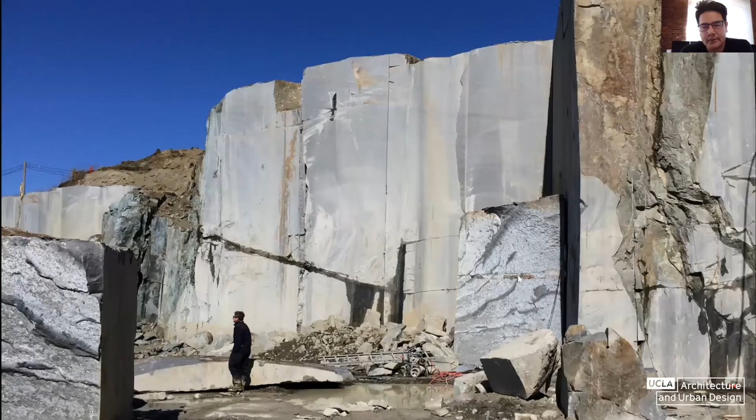12 years later, we think about media and we sort of wonder what about our lives isn't media, what isn't mediated, what isn't somehow already run through a kind of interface. So whether you're forming geometries on your computer or whether you're surveying a site for a project, whether you're cutting stone with a robot, all these things are mediated always already. And so we started thinking about what is material after media, not just media as a material.

And so we've been working on a book. This book is coming out in the fall. It's called Verify in Field, where we've shifted from media as material to sort of material after media. And this also corresponds to a shift in the kinds of projects we're doing, maybe less in the kind of electronic interactive realm, maybe more in the kind of material, hopefully still material innovation realm.

So when we ask what matters, the first thing that we think about is, well, matter matters, material matters, and what choices do we make as architects to sort of have a kind of greater impact? And so this first little project I want to share is sited in Spokane, Washington. It's about a kind of instrument for looking at the landscape. The site is quite dramatic. It's the sort of falls, you know, the Spokane River, and the kind of incredible topography of the falls.

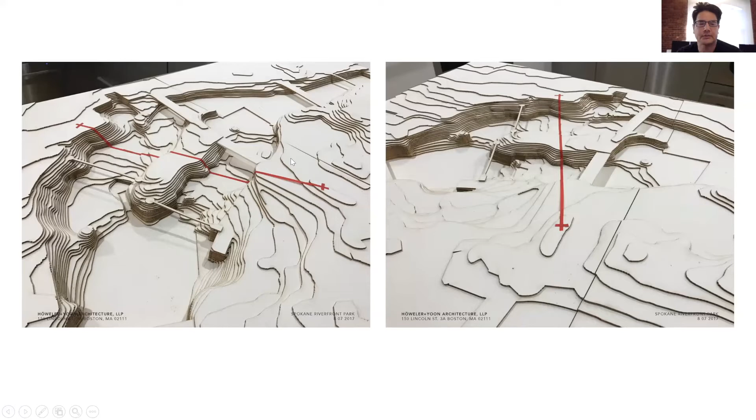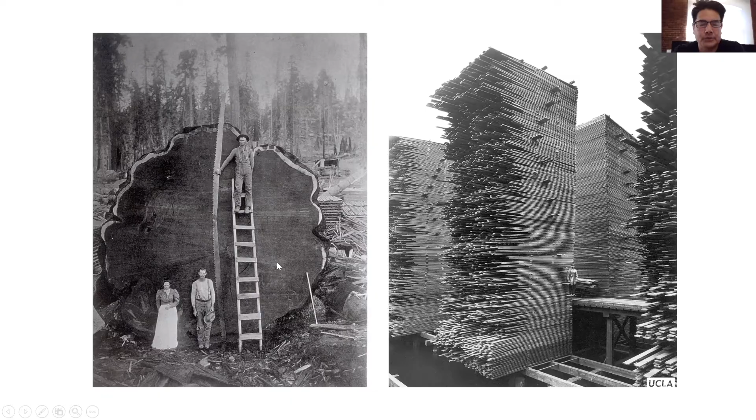Our initial concept was to situate two projects on opposite sides of the falls and have them sort of look at each other. And so a kind of place is in a way a kind of instrument. We also looked at the sort of history of the site and said maybe we can use material in an interesting way. So we proposed to use mass timber. It's something that we've been interested in learning about.

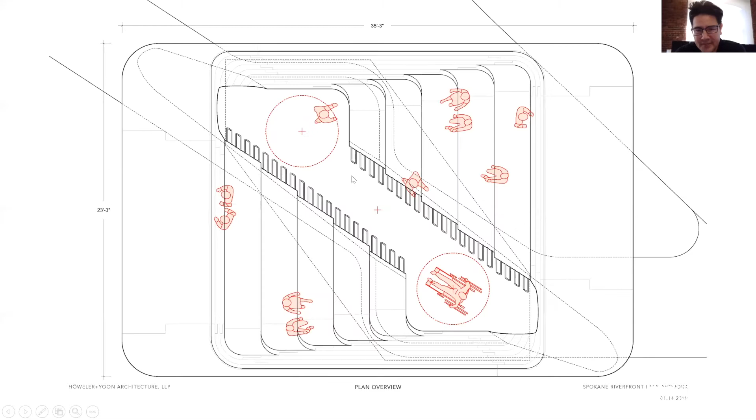So we were very interested in saying, could we do something with timber? How do we sort of think about mass timber? How do we use a project to sort of learn about mass timber? It's something that we are not experts on. So we proposed a small pavilion, a kind of two-part amphitheater that faces each other. This is the plan form: two little amphitheaters looking at each other.

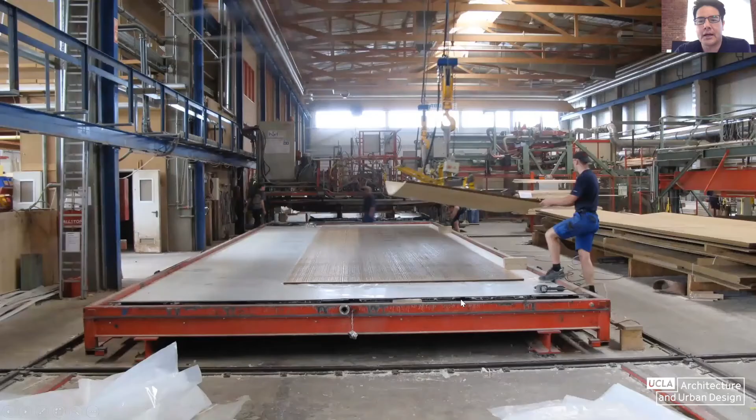And we noted that we used to think about wood in terms of the kind of craftsperson, the kind of shop. And now we think about the kind of industrial scale of wood, where wood is harvested, it's used very efficiently, it's composited and engineered. And then how do we use what we've learned from other materials about the kind of working envelope of some of these tools? And so we're looking at mass timber, not in the formats of beams and slabs, but in the formats of kind of sculptural form.

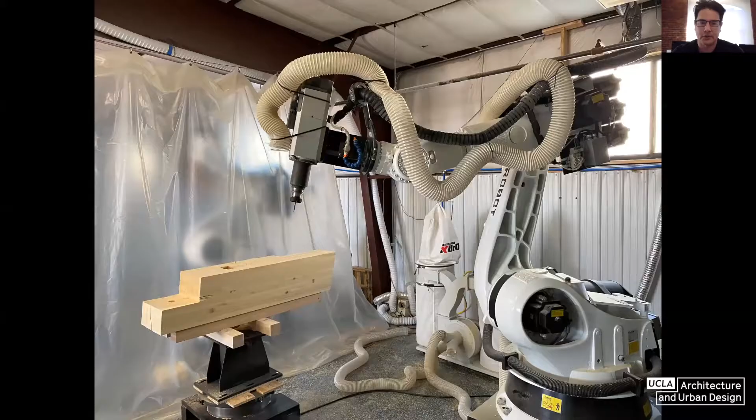And so this project, we call it the timber stepwell. It uses a kind of robotic work envelope to reconceptualize how we think about mass timber, not in terms of parallel planes, sheets, or columns, but rather as a kind of sculptural form where they're non-parallel planes, and we're really exercising the robot in terms of producing sculptural components.

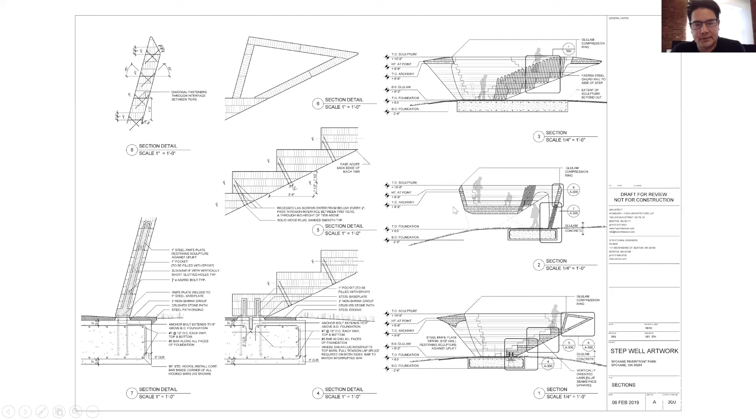So we're working with some collaborators we've worked with very often called Quarra Stone. They're based in Wisconsin. We purchased Alaskan yellow cedar. Quarra is laminating it into these massive blocks of timber, cutting it out, first with a chainsaw and eventually with the robot. So the rough cuts are done by hand. Eventually, the precise cuts are done with the robot, cataloging the parts and really thinking about mass timber in a different way.

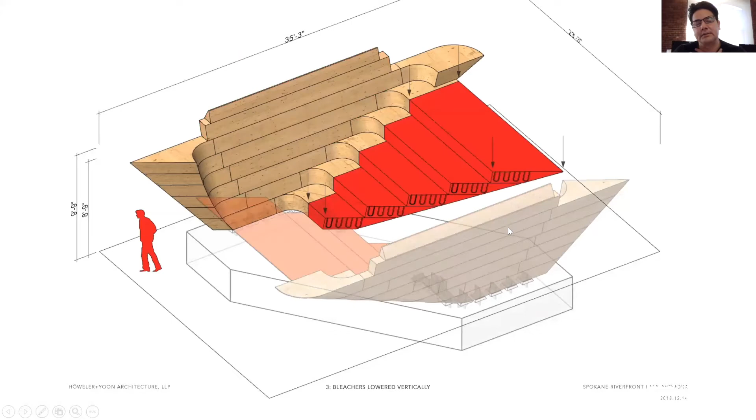Obviously, the benefits of this are arriving on site with very few components and being able to erect a structure quite rapidly. So repeating components and then infill pieces, and arriving at a complete structure very quickly. We think this is interesting to think about this material not as a replacement for steel or concrete, but actually as its own expressive capacities as a volumetric condition.

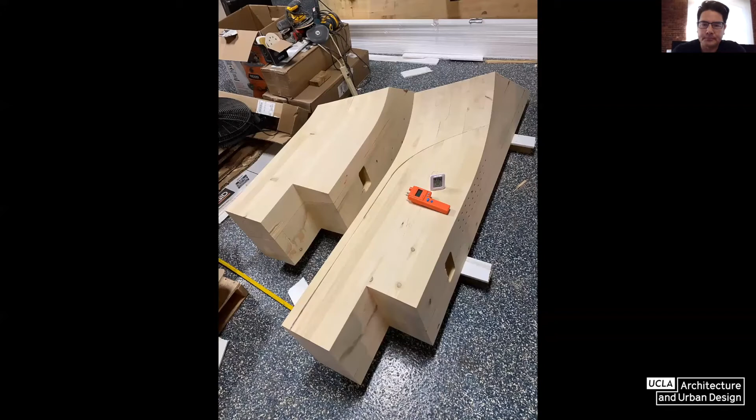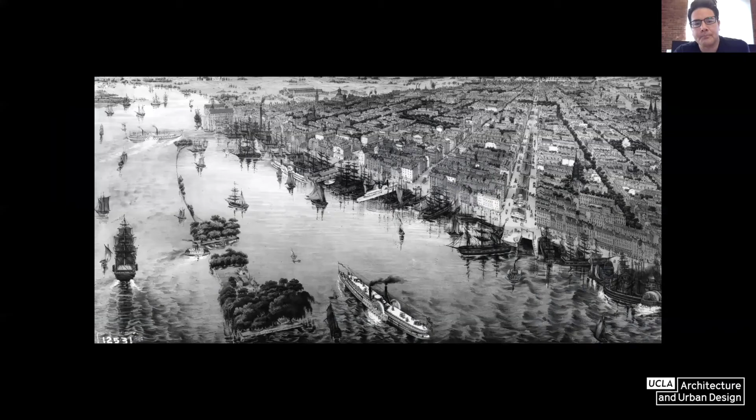The second thing that we want to think about is ecosystems. We know a lot about ecosystems. We don't quite understand how to embed ourselves in them. And so looking at a project in Philadelphia, we know historically Philadelphia is a city between two rivers that historically emerged as a kind of waterfront industry. Here between the Delaware and the Schuylkill is a proposal for the Schuylkill.

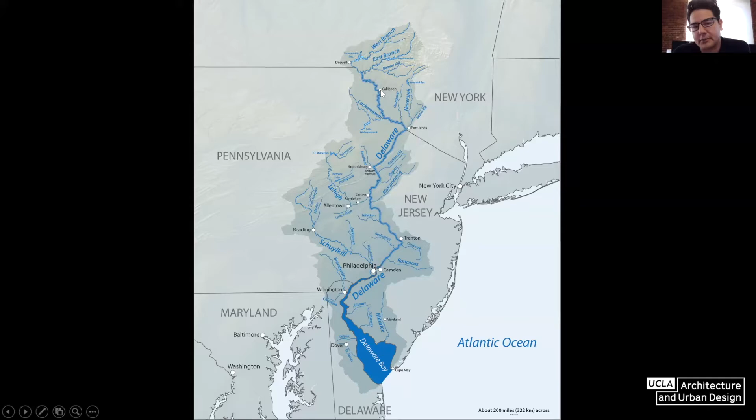And what we learn about these rivers is that their tributary area actually takes us all the way into coal country. And what I didn't know about Philadelphia is it's a kind of epicenter of coal, gas, and extraction. And so what we learned about the Schuylkill River is that it was highly, highly polluted. At some point, it actually caught on fire. And over time, it's been remediated. And that remediation has actually made the river accessible. Wildlife is returning, and we thought, how do we bring people back to the waterfront to experience that ecosystem in their backyard that they forgot about, that they turned their backs on?

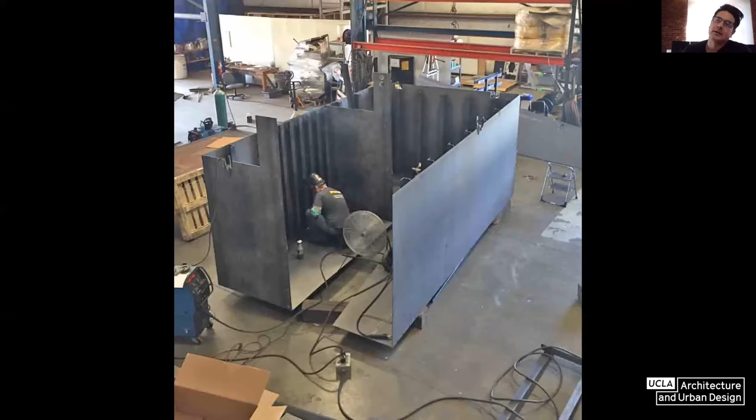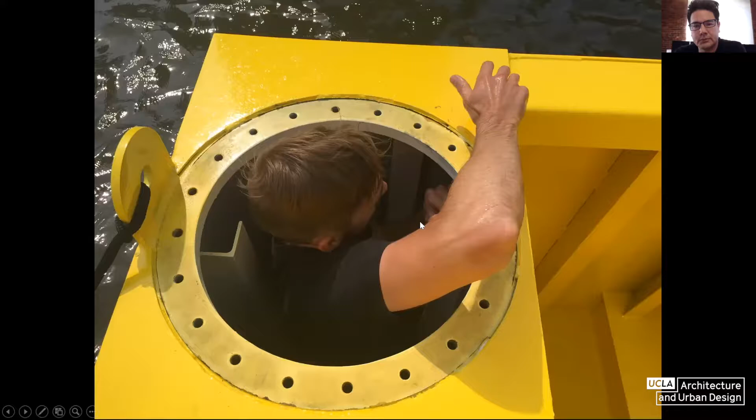We can sink this steel barge basically into the river and produce a new vantage to appreciate the river almost at eye level. And so this was the mock-up that we deployed in Philadelphia. And having done this, we were able to secure the money, the $2 million, to build the real project, which is this one.

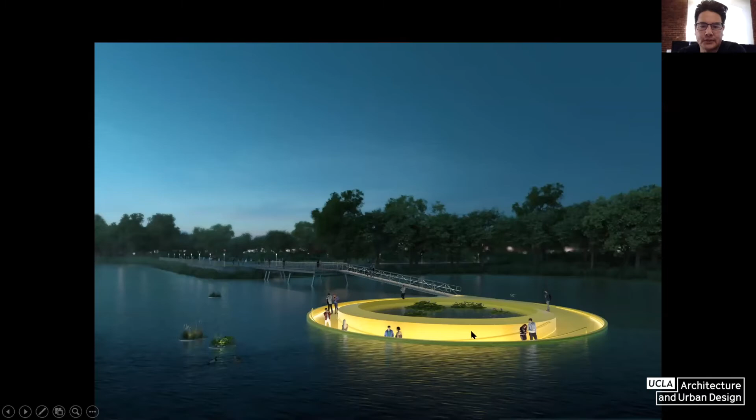And so this is a project we've been working on for about 4 years now to get the permissions and the permits. We have to go through the building department, but also Parks and Recreation, but also the Army Corps of Engineers, but also plenty of other authorities having jurisdiction. So this is a rendering of what we call Float Lab. It's intended to provide these interesting vantages, but it's also scaled to be able to host a number of outdoor workshops and classrooms.

This is connected to Bartram's Garden, which is a botanical garden. And the hope is to bring kids to this place, have them do some activities, have them check the water quality, have them peer through microscopes, have them look at the city from a new perspective, and understand in a way the history of this urban ecosystem vis-a-vis the skyline, but also the extraction industry that's in a way bracketing this urban waterway.

Another thing that is very much on our minds is this question of memory, and how do we think about the status of memory in the age of instant updates and notifications. As we're distracted by our phones and constant beeping and buzzing, are we still capable of remembering? How do we remember things that are important?

So this project was a memorial we did for Sean Collier, who's an MIT police officer who was killed a few years ago during the marathon bombings. And MIT asked Meejin to design a memorial, and they said, we'd love it if it could contain some patriotic symbols like flags and stars and stripes. It'd be nice if it had a boulder, because Sean loved nature. It'd be good if it had some trees, so a kind of list of requests.

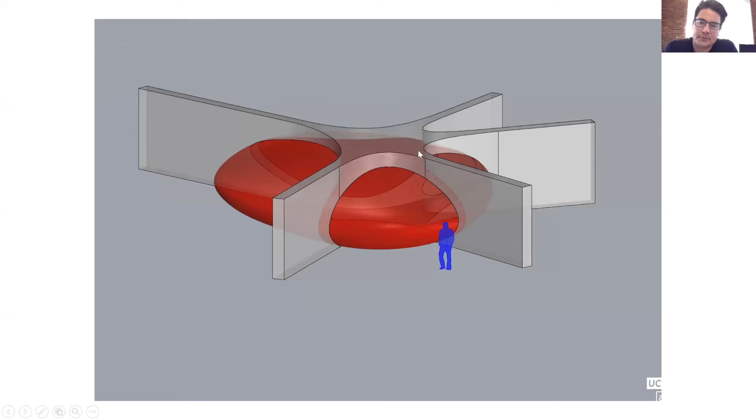This question of symbols and stars and stripes was hard to think about, but we thought maybe the hand was something more accessible, maybe an abstraction of a hand as it intersects with a figure, and the subtraction of that figure through a Boolean operation could produce a hollowing in the urban landscape of MIT's campus, such that you would feel like there was something missing here, a conspicuous absence.

So this is the site. It's right between Frank Gehry's Stata Center and the Brain and Cognitive Science Center. And this is the Koch Institute of Cancer Research. So this is where Sean was parked when he was killed. We proposed this figure to occupy the site. The idea is that it's a kind of gateway to the campus. When you walk through it, you might feel like there was something that was just here and now it's not, something conspicuously absent.

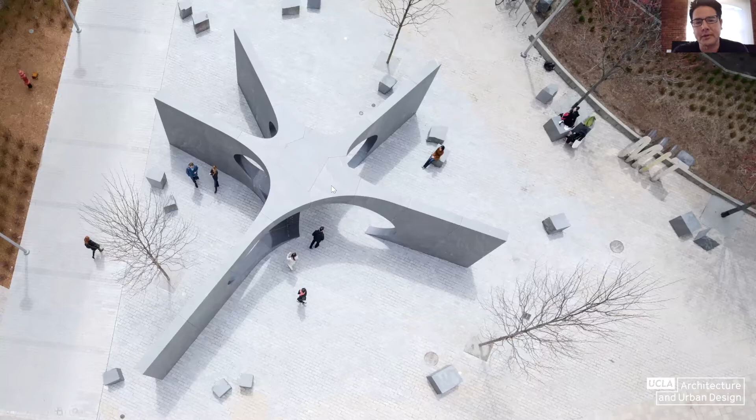And we thought maybe it could be made out of solid blocks of stone. We were admiring the fit of Inca masonry and said, maybe it could be solid. And so working with John Ochsendorf, a structural engineer at MIT, we said, could it be an arch? Could we achieve this voided figure as an arch, a five-way arch, an irregular, very shallow, very horizontal arch?

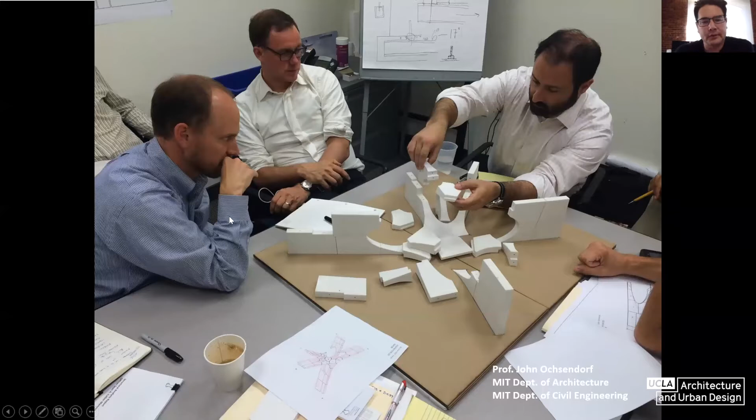So we proposed to MIT that we build this out of solid blocks. And with John's support as a structural engineer, he said it's perfectly achievable. In a way, it might be simpler to make them solid as opposed to trying to clad a steel or concrete structure. So we worked with John Ochsendorf here on the left, and then Hauke Jungjohann from Knippers Helbig in the middle, and this is Sam Morelli from Suffolk Construction. And here we're working with physical models to see how it would be done.

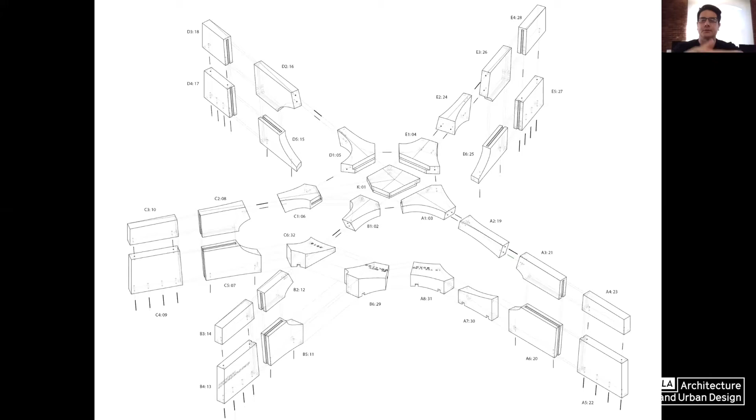We procured the stone in the quarries and found blocks large enough to meet our needs. And then working with the engineers, we understood that it's super deflection sensitive, and the transfer of forces really needed to be absolutely precise. We didn't want any misfitting stones, because misfitting stones could result in concentrated loads, and concentrated loads could result in spontaneous breakage.

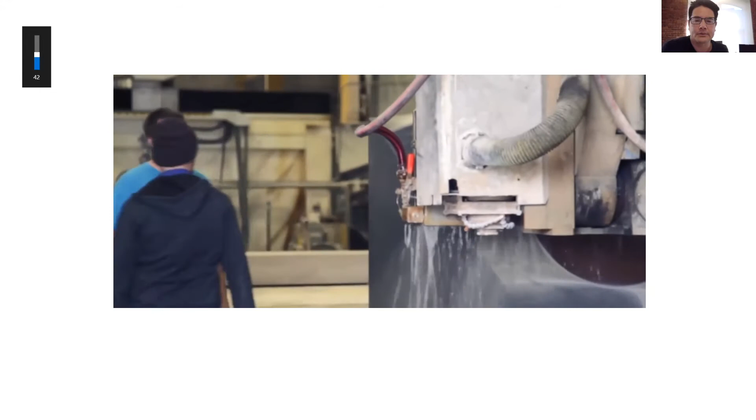So we really needed to ensure a kind of near zero tolerance fit. We did work with Quarra Stone again in Wisconsin to figure out a workflow that would take the stones from Virginia to Wisconsin to be carved quite precisely, and then trucked to MIT for installation. And this was our first encounter with digital fabrication at this scale. Quarra was fantastic in terms of asking the right questions, working back and forth across digital models.

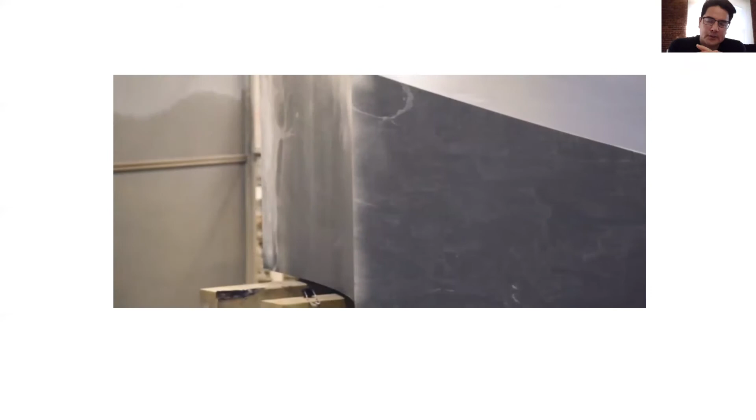And the part that I wanted to convey is, when you send a model and you think, well, surely they can just give me my model fabricated in stone, we neglect to talk about the kind of material resistance that the actual stone will provide. And when we think about precision of digital fabrication, we don't really think about how do we know that it's in fact, how do we verify?

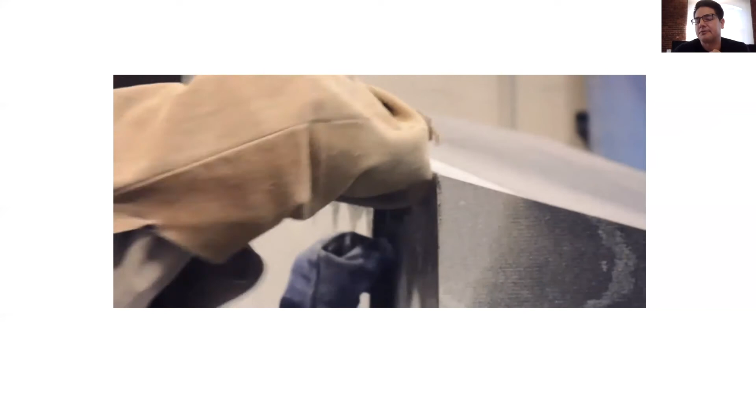So the question of verification that we're asking in the essay in the book is, should we think about techniques of verification at different scales? And so all the trust we have in digital fabrication leads us to believe that we can output a material artifact to the precision standards that we apply to digital processes.

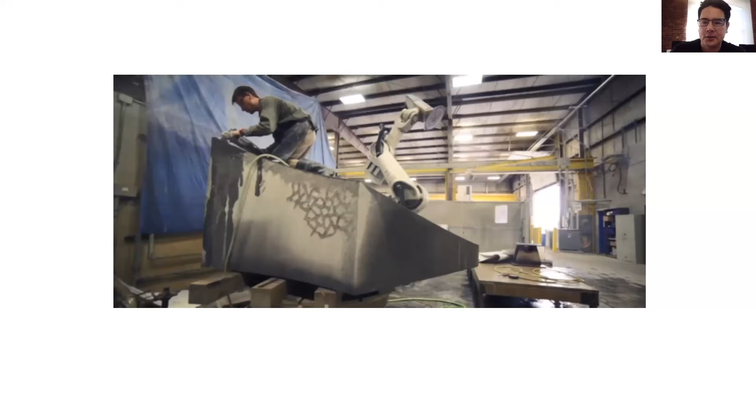When in fact, we were standing in the shop, and the owner of Quarra asked me, well, do you know where the interface between the tip of the saw and the stone is? And I said, well, sure we do. The saw is a certain diameter, and the stone has a digital model, so we should know where that interface is. And he said, well, the saw is cutting the stone, but the stone is also cutting the saw. So every time the saw passes, the diameter is diminished ever so slightly. And so how can we be sure?

How do we deliver the precision that you've asked for? It turns out that the saw needs to be calibrated after several passes, and adjustments made to the tool path to account for the diminishing of the saw blade. But in that moment, the idea that the saw is variable and the stone is variable, and that our digital tools actually have to take into account the material reality of the stone and the saw, was really eye-opening.

And so working with fabricators like Quarra that are thinking through these questions of precision and are kind of intolerant of tolerance, I think was highly eye-opening. We did develop a QA/QC process to verify with some point-to-point dimensions after the fact, so we could verify before they shipped. And once they arrived at site, they were then re-verified in terms of dimensions to make sure that they fit.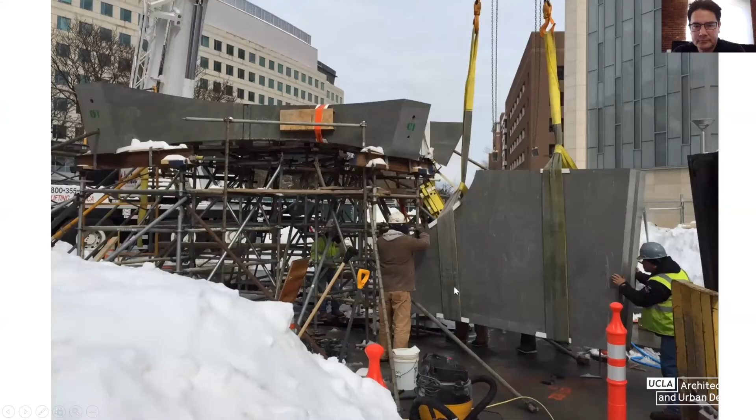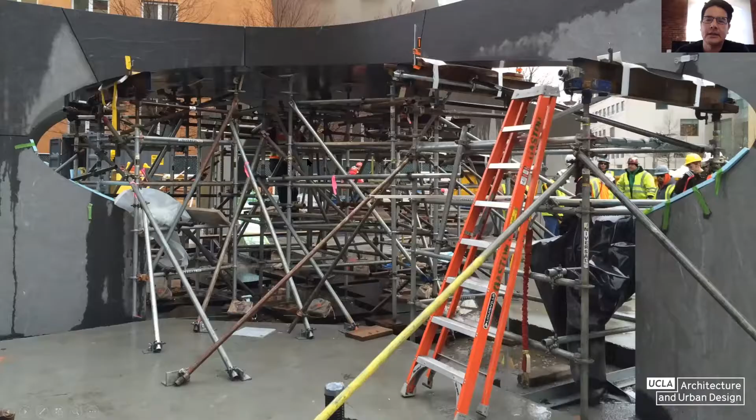Here's the first stone, the keystone, labeled K1. And this was constructed over winter to meet a very hard deadline of the anniversary of the killing of Officer Collier. It was built up on scaffolding, as you can see, and the buttresses were added to the vault, which is emerging. All this was built on industrial strength scales. So all the weight of the stone was measured as it was sitting on the scaffolds.

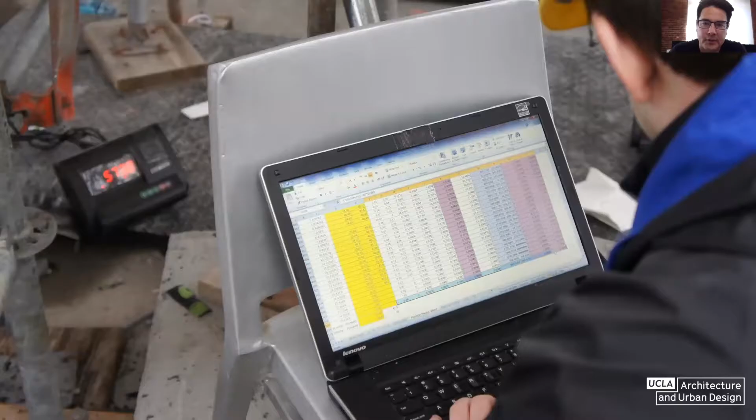Interestingly, you can't see force, but you can measure weight. And so we were measuring weight, and at the moment where the scaffold was lowered and the stone transferred from bearing on the scaffold to bearing on adjacent stones, we were able to watch the transfer process of the loading on the scales from the center to the periphery. So here's a real-time spreadsheet of the load that the scales are seeing. And we were able to verify that, in fact, as the scaffold came down, those forces were transferring to the adjacent stones and ultimately to the buttresses.

So after 8 hours removing the scaffolding, John Ochsendorf shouted out, we have arching action, which is super exciting after 9 months of watching these stone blocks suspended in midair, waiting for them to engage in arching action.

If you come to MIT, you'll see this memorial, and you'll feel the presence of this hollowing process. It's kind of remarkable. It has its own acoustic qualities in there. And the arch is so shallow that you've never seen anything like it. Yet it does seem somehow familiar, because this vocabulary of forms are forms that we've become familiar with in our digital spaces. We just haven't seen them materialized in this way in our cities and in our real life. So it has an uncanny presence on campus.

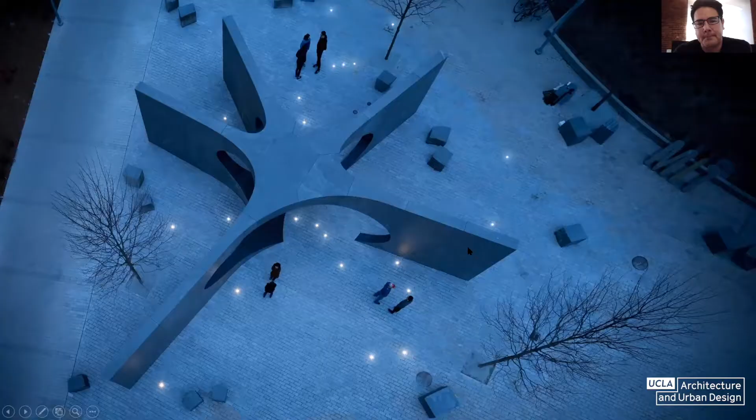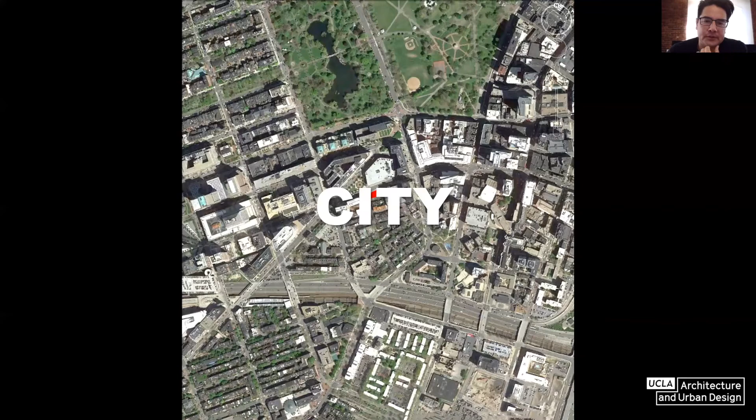Okay, another topic that we've been thinking about is the question of the city and how to build in the city. We've only just started building in the city of Boston, which is a kind of tough city to build in, partly because of so much historic fabric and the kind of processes in place for approvals that require a certain kind of acknowledgement of that historic fabric.

And so we're building a building in Bay Village, which is a landmark district in the city of Boston. So there's a very rigorous process for getting approved in this neighborhood. And we spent about 4 years on the approvals. So it's been quite a struggle. As the project went forward, we sort of sketched out some ideas of what we thought it might be.

It's a 20-story multifamily residential building in a neighborhood which is surrounded primarily by 2- and 3-story brick brownstone sort of buildings. But it's also along what Kevin Lynch would call the high spine. So there's a number of tall buildings that connect the Prudential to the downtown, and we are along that sort of corridor. So we're right between two neighborhoods, thinking maybe it could be tall, maybe it has to sort of defer somewhat to this historic neighborhood adjacent to it.

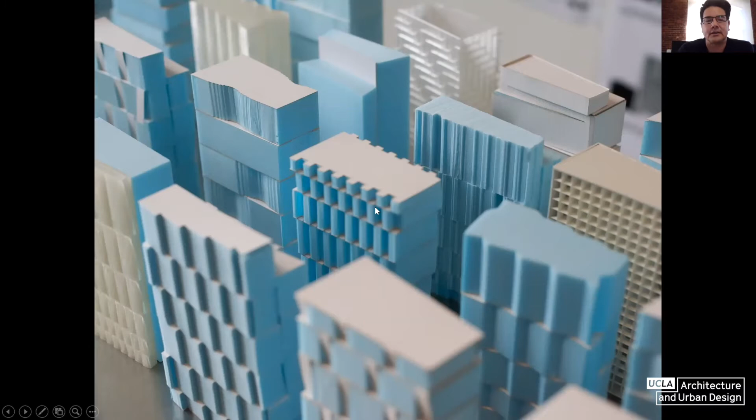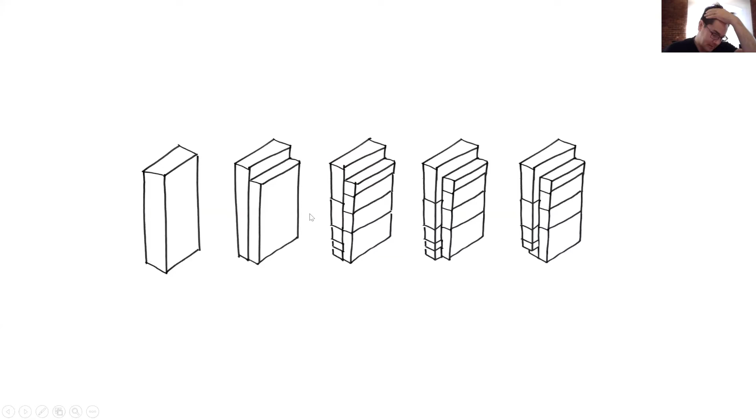So a lot of our studies had to do with scaling effects. How do we sort of break down the scale? How do we acknowledge the units? How do we provide outdoor spaces? And one of the things that we learned is that the perception of a building's scale is really a function of how we articulate its mass.

So we could articulate it as a kind of monolith, or what we've come to call a coursed block, almost like a series of masonry courses. So this was a proposal to course the floors into packages of 2, 3, 4, 5, and 6 that attenuates as it rises. In terms of the plan making, it's pretty much this whole site area. And so we've maxed out the site and strategically positioned the core and stairs to absorb the kind of depth that we don't need.

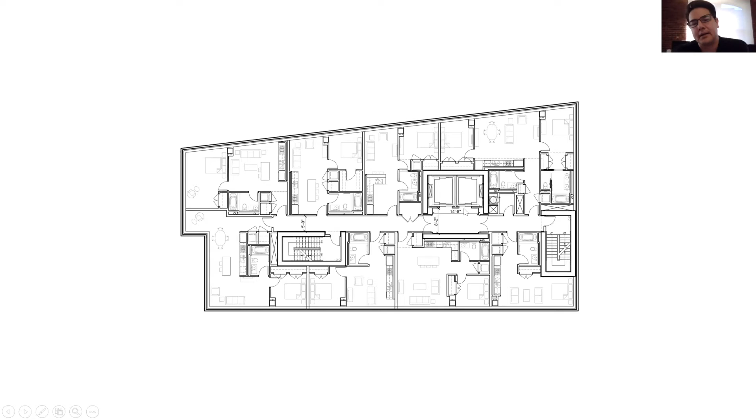And then the expression is really a question of how do we provide a kind of thick, sculptural skin that would be appropriate in this historic neighborhood. So we propose a series of concave piers that are made of repetitive molds, and then we tried to optimize for a lot of variation with as few molds as possible. We very quickly translated these into plaster and eventually stone to engage with the client and the community in terms of what would be appropriate in this neighborhood.

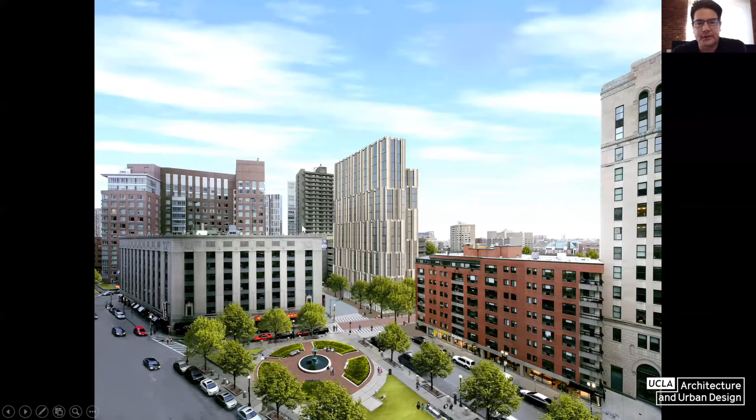And here's the proposal in its context. From the neighborhood, these 2- and 3-story brick buildings, this building will be a kind of bookend to the neighborhood. The fluting of the piers, I think, is a gesture to the textures of the historic context. And one of the arguments is that it's not stylistically related to anything in the neighborhood, but it does have a sense of quality.

And what everyone's afraid of is a building that is thin and unarticulated, that has no qualities. And so we've proposed a building that's thick and heavy, massive, as opposed to light. Another lesson we learned is that neighbors who are predisposed to object to new construction in their neighborhood respond better when you say, oh, you're not going to be looking at our loading dock, you're going to be looking at new neighbors in these townhomes.

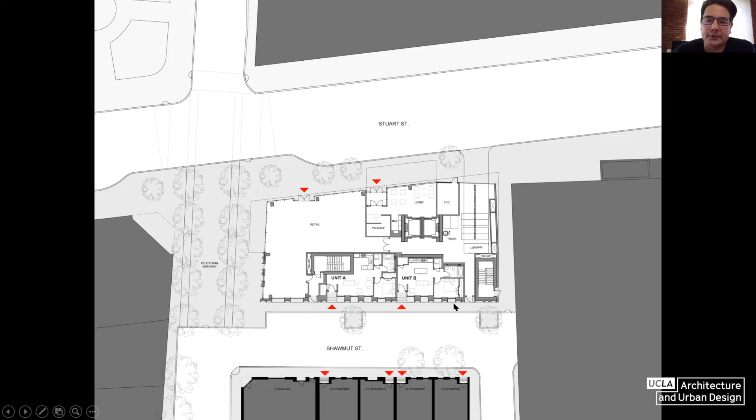So we have 2 townhomes facing across the street from these other townhomes. And so the loading docks on Stuart Street and Shawmut Street have more residential character. And so the detailing as this building meets the ground has a play on the decorative ironwork and the stoops and the planter boxes that the neighbors have. But it's how we manage to negotiate a tall building meeting the ground as it plugs into this residential neighborhood in Boston.

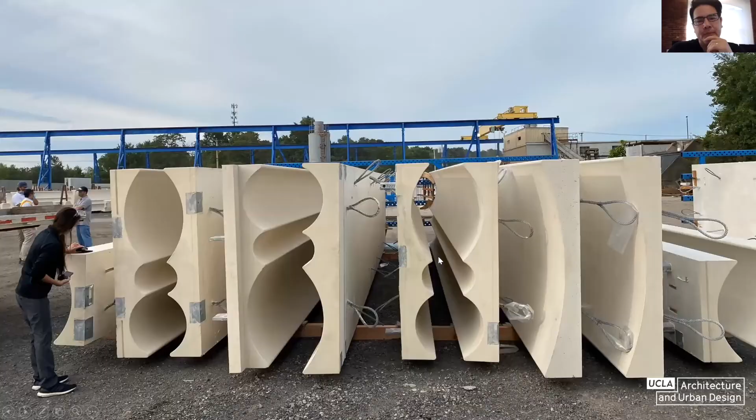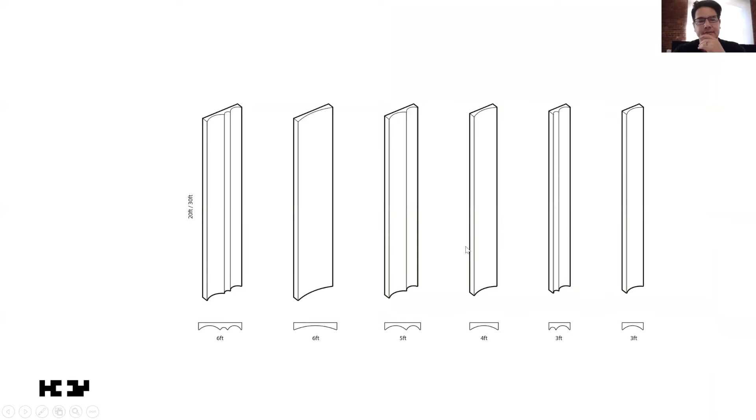And these are some of the mold pieces coming off the molds. We're admiring their geometries, and when they catch the light, they really come to life. We did a lot of studies of optimization for molds, and we learned that the best optimization is actually for picks, how many times the crane has to pick them. So we can buy more molds, but buying crane time is actually the thing to optimize for. So it's not material, it turns out it's labor.

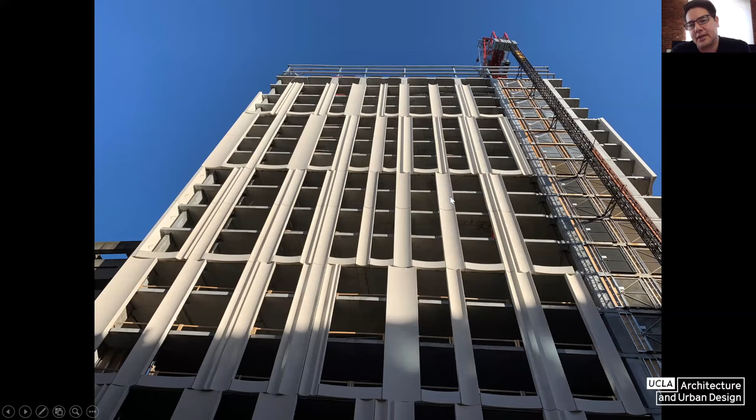And this one was from a few days ago, where they're placing this 3-story panel at the very top of the building. So I think we did develop a system which accelerated construction and minimized labor. It did introduce other problems like differential deflection and live loading on alternating floor slabs. But our hunch about saving time through labor was an interesting learning.

So at the same time, we've got globalization, we've got intense localization. And one of the things I say sometimes is that all construction, like politics, is local. You can't actually impose a universal construction in a place that you're not familiar with. The client for this project insisted that we build a traditional Chinese courtyard house. And because this was an opportunity for us, we said, of course, we can design a courtyard house in the Chinese tradition of Chinese courtyard houses.

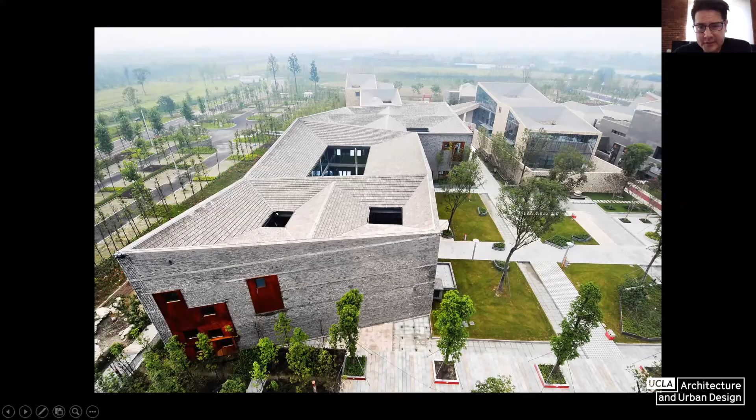So this is the project we built. This is now maybe almost 10 years old in Chengdu. It's supposed to fit into this odd-shaped puzzle piece master plan. We were asked to look at traditional Chinese architecture where the buildings form the frame and the figure. And so you have a building that is seen in the round, and you have buildings that are really part of a field condition. And then you have a wall that bounds the garden.

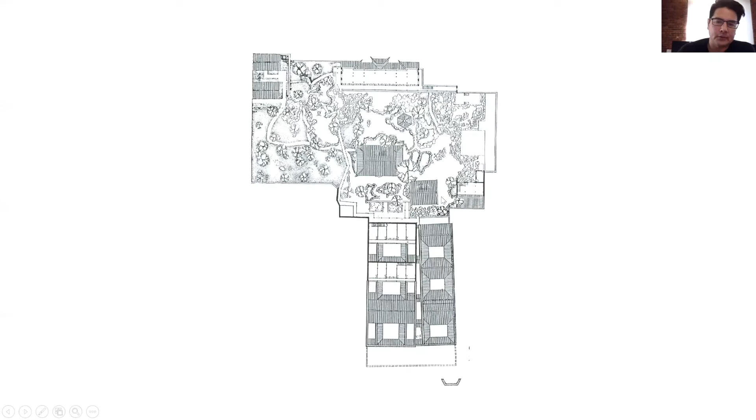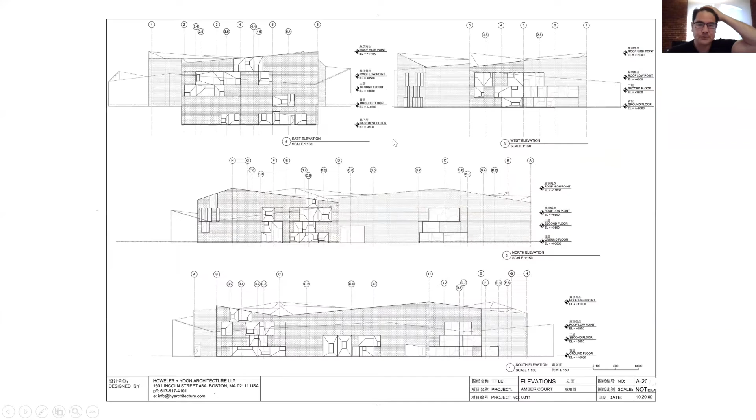The client sent us to look at these courtyards and gardens, and we tried to experience Chinese feeling in this moment here. My Chinese colleague said that foggy opaqueness, that's Chinese feeling. So we went back and revised our schemes. We came up with a set of drawings. We submitted the drawings, and then we didn't hear from them for 9 months. When we did hear from them, they said, your building's under construction, actually, and can you help us with the material choices?

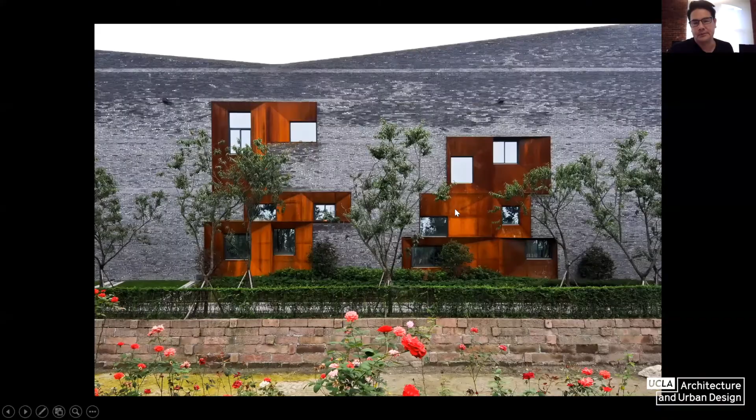And so we quickly developed a palette of these gray bricks and Corten steel window surrounds. The thing about this building is that it seems much taller than it is. It's a 2-story building, and the amount of opaque surfaces was quite significant. So amplifying the windows with these Corten surrounds, I think, helped give the fenestration a larger presence.

And the part that I think was really successful was where we looked at the most pervasive material available in the region, which was this gray brick. And we said, well, maybe if each brick had a kind of internal compass to it, maybe each brick oriented itself on the cardinal directions, maybe that would give this building some rigor. And so we did 2 sheets of drawings where all the east-west bricks are aligned, and as they start to transition to these oblique surfaces, they start to stagger.

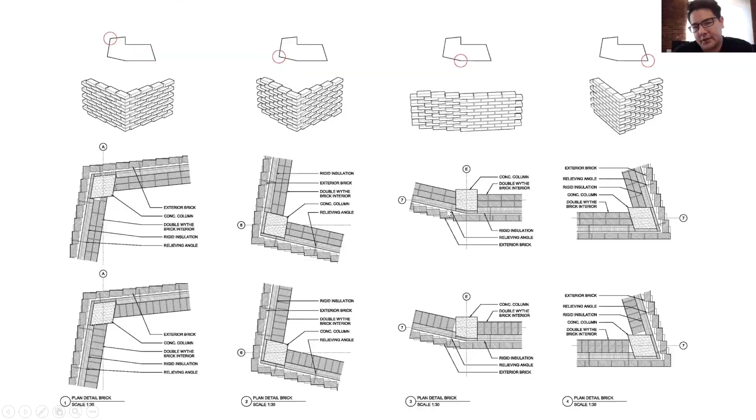And so at every corner, whether it's cardinal or oblique, the brick would signal a kind of true north. And so when you walk around the building, you see transitions from true east-west to oblique surfaces. An east-west wall meets a diagonal wall, and 2 oblique walls coming together.

And this very simple idea of giving each brick a kind of rule was something that translated very easily, not just to the client, but also to the stonemasons. And they were able to execute this without elaborate drawings, without a lot of templates and unique conditions.

This very basic logic actually gives the building a kind of signature texture. I think it embeds, or it encodes, the construction logic and the labor into it. And the client said, oh, this also gives me a kind of Chinese feeling. So we were able to succeed in making a connection, aesthetically, culturally, but also tectonically, to a client who was really insisting on something having a strong connection to place.

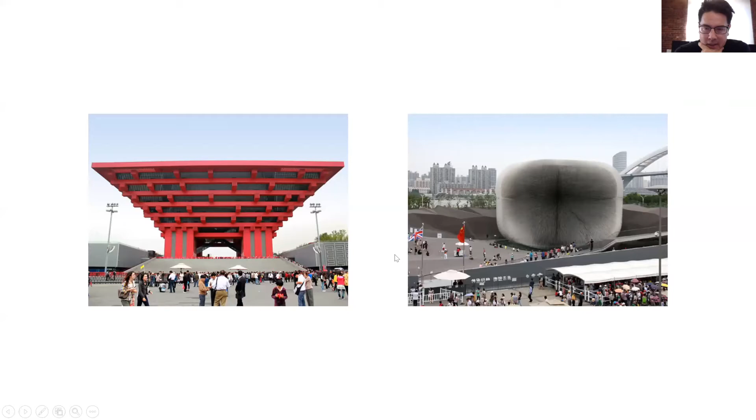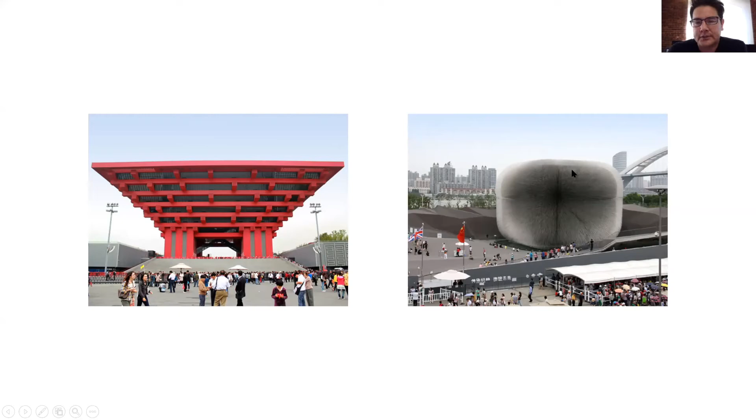We're currently still working in China. We're doing a lot of projects in China. One of them is in Shanghai, on the site of the 2010 Expo. This is Heatherwick's hedgehog pavilion. This was, I think, one of the Chinese pavilions. So the same year, 2010, when Heatherwick was building a building that had no easily understood edge, looking into the future, the Chinese pavilion was still recalling a traditional dougong, stacked lumber kind of form.

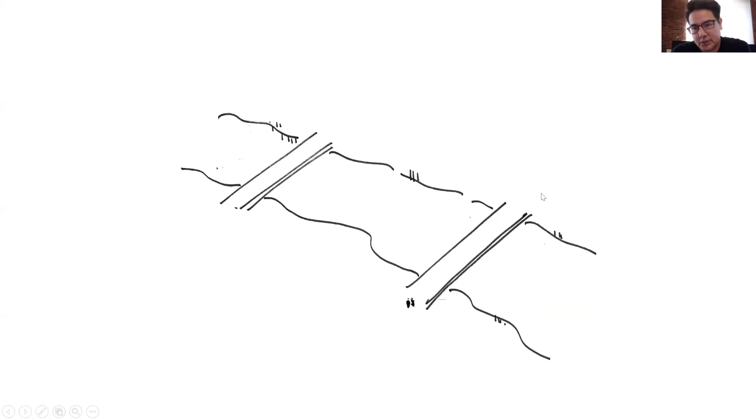So our proposal, this is the Expo site, is for 2 bridges on this artificial lake. We had spent enough time in China to understand that the Chinese landscape is not about a series of objects standing in the landscape. It's really a set of relationships between these objects. And so when we presented, we said, we're not building 2 bridges, we're actually building 1 bridge that frames the water.

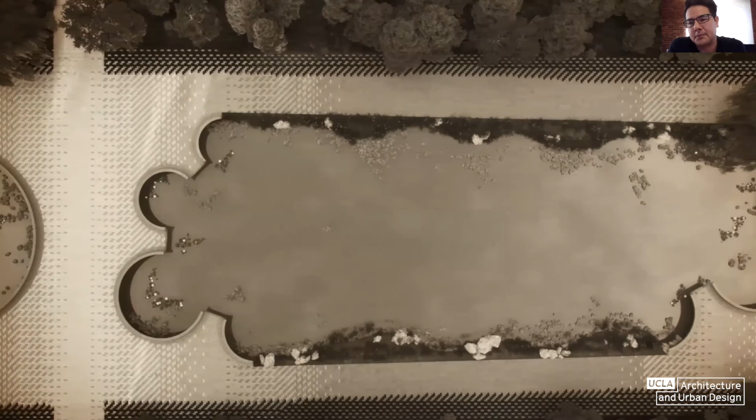And so this concept of a way to bracket the water and create a set of apertures that were about framing the water and framing the sky was what we presented. The idea that the bridge is not so much a way to get from A to B, but actually a place to be on itself, that there are destinations on the bridge, and that there are moments on this bridge that look across at other moments on the bridge.

And so being able to articulate how this might tie into a larger tradition of Chinese garden structures was, I think, one of the reasons why we were successful in this competition. So we call it the Moon Gate Bridge. The Moon Gate is one of the most iconic of Chinese architectural devices. But rather than framing views or portals, we're actually framing the reflections in the water and in the sky. So that was one of the slides we showed.

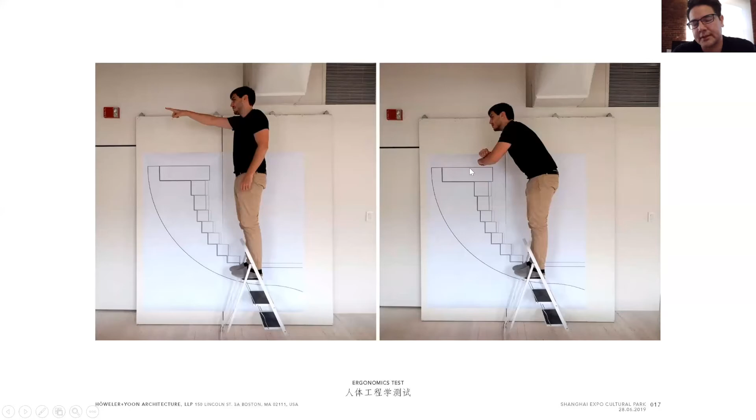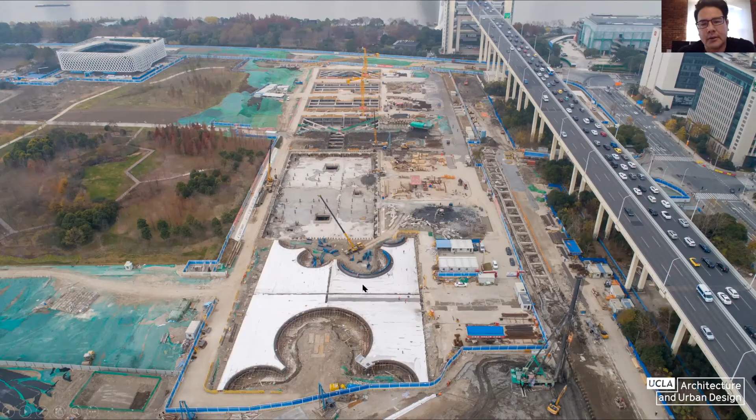But also getting construction photos is always kind of exciting to see that they are in fact moving forward with this construction. So this has been under construction almost entirely during the last year during COVID. So no one's been able to travel there, but we do have lots of communications with the client and the LDI, the local design institute, on everything from formwork to concrete mix to stone selection and everything.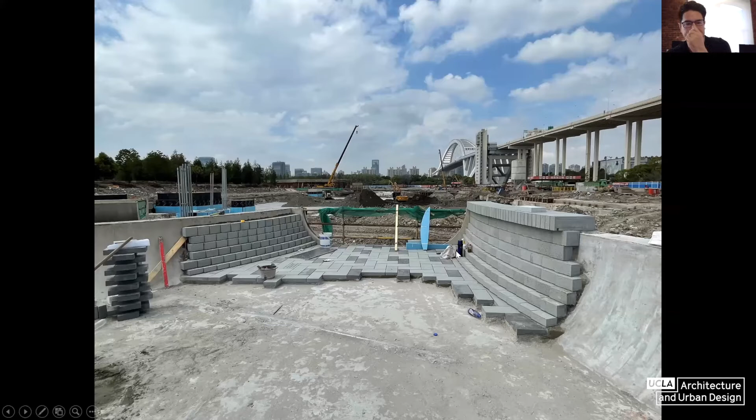So this formwork is quite impressive. It's a compound curvature that forms that concrete liner, which is then faced with the granite blocks on the inside. So this is exciting to see this coming together.

The last project I want to show, and then I'd love to open it up for some questions, is the question of institutions. I think as architects, we're subject to all kinds of external forces. We're not sure where we have agency. And institutions seem to be one of the sites of power or opportunity, capacity.

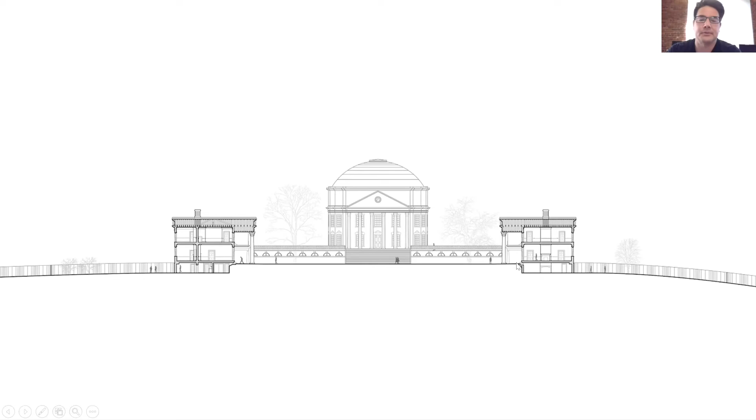And so these gardens surrounded by the serpentine walls that we know from architectural history are not so much about pleasure gardens and any tradition of garden making, but they're actually concealing the day-to-day life of forced labor. And so when you think about that, and you think about Jefferson as an architect, it completely changes the way we think about the ideals upon which the campus was constructed.

And so I believe it was 2008, the leadership of the University of Virginia laid this stone at the bottom of the rotunda to honor the several hundred women and men, both free and enslaved, whose labor between 1817 and 1826 helped to realize Thomas Jefferson's design for the University of Virginia. So this stone plaque was incorrect. It was too small. It was poorly sited.

The insufficiency of this plaque, I think, is what catalyzed a group of students to form what they called the MEL, the Memorial to Enslaved Laborers group. And they created pressure and visibility to this cause to force the university to acknowledge its history in a significant way. And so from pressure from the student group, the university took a number of actions, including forming the President's Commission on Slavery and the University.

They did scholarship, they looked through documents, they assembled names, and the last thing they did is they hired an architectural team to develop a concept for the memorial. And so this process was ongoing for, I believe it was 6 years, before they brought a team in to start to work on this.

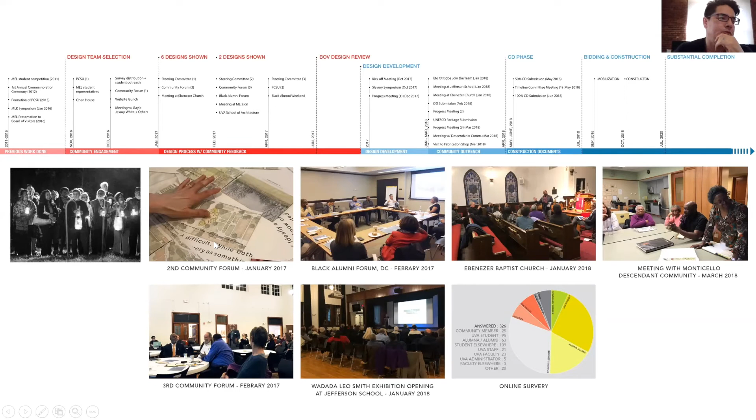We put together a team, Megan and myself, with Frank Dukes, who's a UVA professor, a kind of community engagement specialist, Mabel Wilson, who's a historian and an architect. She teaches at Columbia. Gregg Bleam is a landscape architect, local to Charlottesville, and Eto Otitigbe is a Brooklyn-based artist. So we put together this team, and before we started designing anything, we sort of designed a process.

And so we met with communities, met with faculty and students, met with people in the neighborhoods, people that were descendants of the enslaved, and we listened and we heard. And for 6 months, we tried to figure out what it was that they were interested in, what a memorial could be. There was no site, there was no budget, there was no program. And here's Mabel and Frank in one of our charrettes.

We did a lot of meetings with students, a lot of meetings with neighbors, with people in the community, understanding the history of enslavement at UVA and building on the fantastic work that the President's Commission on Slavery and the University had done. There's a lot of outreach, and at the end of the day, we made a few proposals for where it could be. We were struck by this term, "Let Freedom Ring,"

and what we learned about this African dance called the ring shout, and we thought maybe it could be as simple as a ring, just a kind of empty hollow, a kind of clearing where people could define a kind of void, so similar to the MIT memorial, where the main effect is a kind of emptiness. Here it's much larger. It's a kind of 80-foot diameter patch of grass that's encircled by what we call a kind of rising ridge or horizon line.

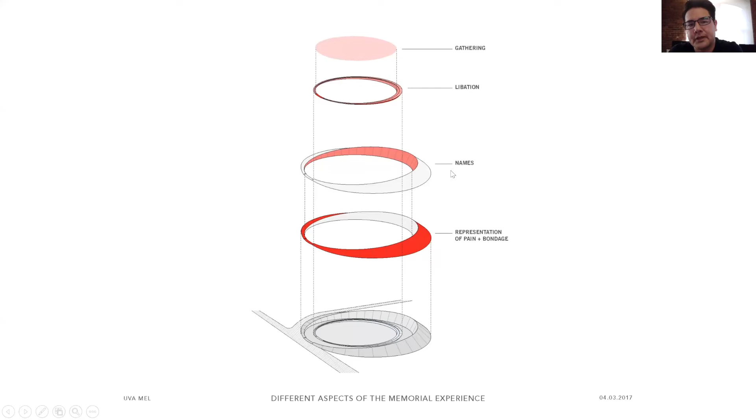So this represents two cones intersecting, one with a rotated axis, but it produces a kind of interior surface and exterior surface. And it masks, in a way, the context. So this was one of the representations where we can create a kind of clearing for people to gather, a place to gather for them to recognize themselves as a community, but also to reflect on what the history of this place has been.

It turns out it's almost exactly the same diameter as Jefferson's Rotunda, which was actually a surprise to me. It's about 80 foot, kind of half a sphere, kind of dome, and a kind of bowl-like shape. So they seem to be in dialogue. Some of the geometry, some of the construction documents, and then mocking things up. We set the angle of this cone by the tip of your toe to your outstretched arm, and then how does that rise over your head so that you're not looking out, but you're looking in.

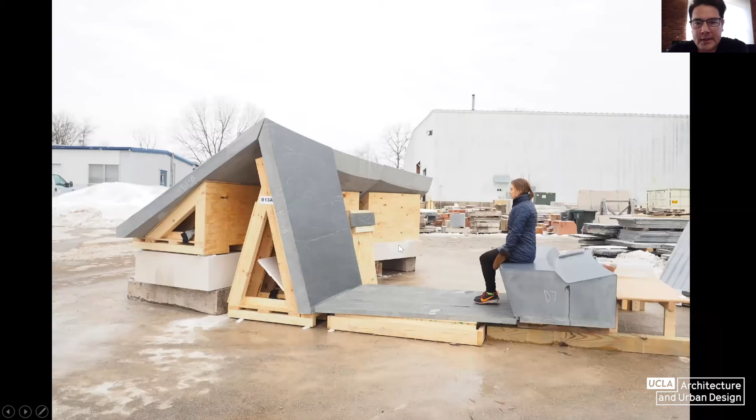And then from the outside, how do we create a surface that creates an explicit sense of enclosure, and invite you to come around and enter it. So again, we worked with Quarra Stone in Wisconsin to carve and mill these components to form this cross section. Working with Eto, he was inspired by the crude stonework in some of the gravestones from that period.

She had actually been taught to read and write. And after the Civil War, she stayed in Charlottesville and taught at the Jefferson School, and wrote about her experiences. And so she's one of the few of the enslaved for whom we have a photographic record and for whom we actually have writings describing her experience.

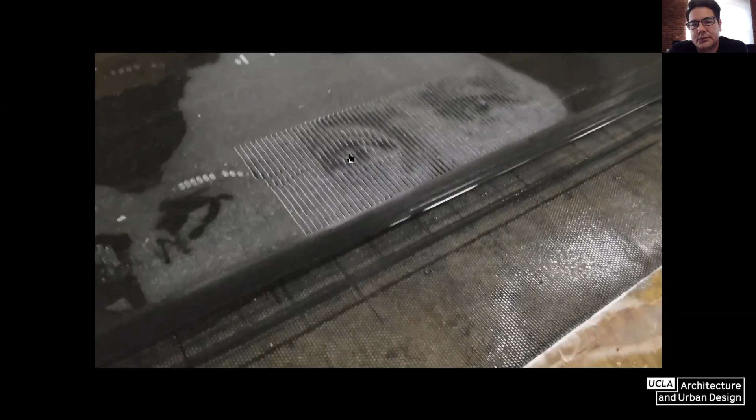Eto's previous work had looked at self-portraits and translating images from raster to vector files. He had carved his own portraits using basically scripting CNC tools to alter the depth of a groove. He took Isabella's portrait and her eyes and etched it into the stone to create a series of grooves that would contain in their variable depths a kind of abstraction of an image.

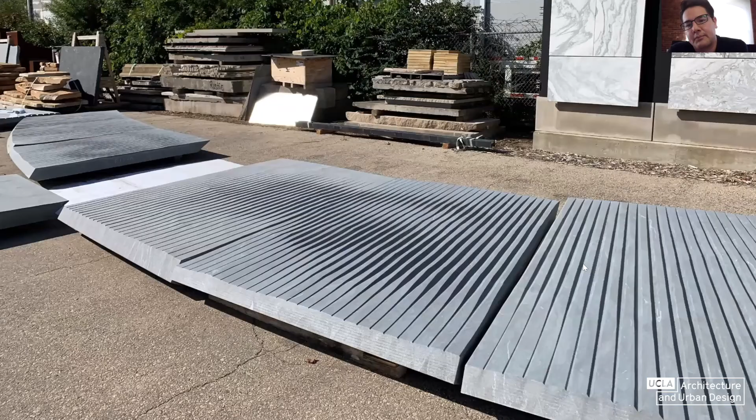So we applied this technique at a larger scale, overlaid it within a field of converging lines that both evoke the rough textures of carved stone, but also the quarry marks that we see in quarried stone. And embedded in that pattern is the eye from Isabella Gibbons. So this is talking about the raster to vector.

And if you go to Charlottesville, I encourage you to walk around it because it's something that you don't perceive right away. These grooves don't have any images, but at a certain moment, in a certain light, Isabella's eyes come out. And some of the descendants have said, well, this is amazing. She's kind of a witness and a watcher. She's, as their ancestor, somehow watching over them.

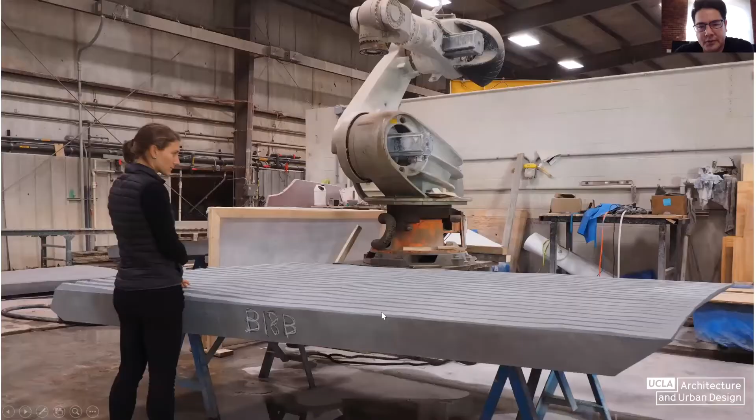And so the descendants have really taken this memorial as a gesture at the beginning of the discussion about repair in a very fractured relationship between the university and the descendant community. For us, participating in this process was a learning experience, both in terms of history and engaging with different groups, advocacy and negotiation, but also technical learning.

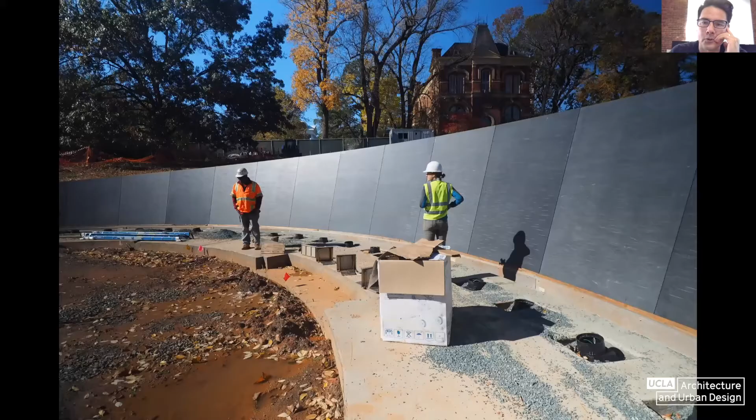The crew that fabricated actually erected, and the tolerances for these alignments were so precise to get these stones to coalesce into a single line. And the more we work with material, the more we realize that for these sculptural effects, the translation from a computer model to material in the world takes on more and more importance. For this to feel like a single horizon line, each of these individual pieces of stone needs to be precisely set.

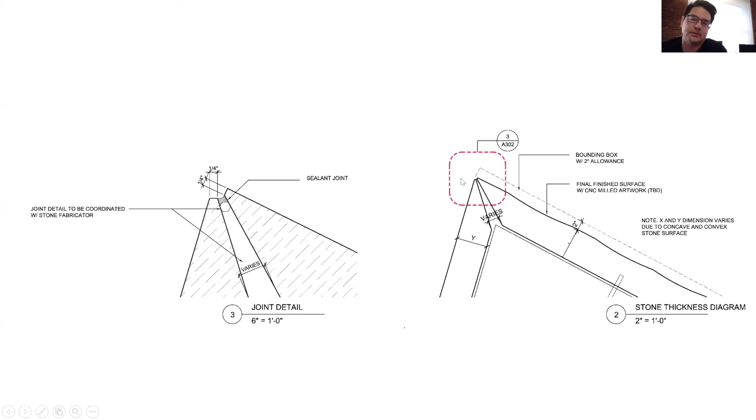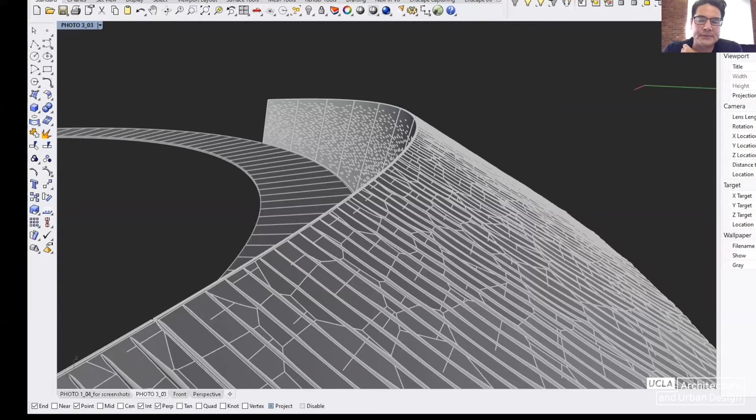And so we note that when we see these projects, there's a flickering between a physical material and a pre-vision of the project in our digital tools. How these things come together really depends on an incredible amount of precision in its setting, not just in its fabrication, and how materials are detailed to come together takes on a lot of significance. And so when we're in the field and we see this ridge line where we have two pieces of stone meeting at a quirk miter, we also see the preview of that image in our computers, almost as if it leapt out of our computers into the world. Obviously, it's not that simple.

A couple of details. One of the programs was to name all the names that were known. And in many cases, many of the enslaved weren't named. They were just called extra hands, or Mason, or family of three. And so working with the scholars to acknowledge the estimated 4,000 men, women, and children that were enslaved at the university.

Sorry, there's a lot of sirens going on.

We worked with very fragmented information, very few actual names. And so when we engraved the stone, we had 4,000 marks, which we called memory marks or gashes. They're underscores, they're placeholders for future names. When we knew the names, like Isaiah, we carved in Isaiah. When it was Isabella Gibbons, we carved in both names. When they were referred to by craft or trade or kinship, like farmer or mother, we carved those into the stone as well.

And so if you go, you'll experience this horizon line, which quickly masks out the world around you. And when I was there, there was an afternoon thunderstorm, and I saw the memorial wet and then very quickly drying, and the water had gathered in these cuts, almost as if it was tearing up or bleeding. So a kind of surprise effect.

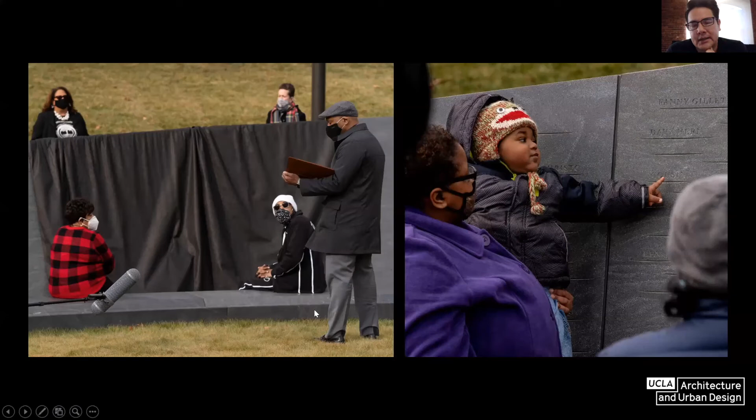We started with 4,000 marks, but we didn't know many of the names. And we said maybe as names are discovered in the archives, we can add those names. And then a few weeks ago, UVA added 5 names to the memorial, and they were etched into the stone. And in a way, the idea that the memorial is open-ended is nice, because it takes something that was brutally obscured and omitted into something that is open and anticipatory. It anticipates more information.

And so maybe I'll leave with one last quote. This is from Herbert Simon that says, if science is the study of the world as it is, design is the study of the world as it ought to be. And that ought-to-be-ness, I think, is what excites us about how we want to think about design and transforming the world into what we think it ought to be like.

Okay, so maybe with that, I will stop and have a drink. Can you hear me? Yes.

Eric, thank you so much for this lecture. I am incredibly moved by the work and by how you presented it. Even knowing your projects for so long, hearing you present them and organize them adds somehow a new dimension of depth and importance relative to, I think, the critical issues of our time. So thank you.